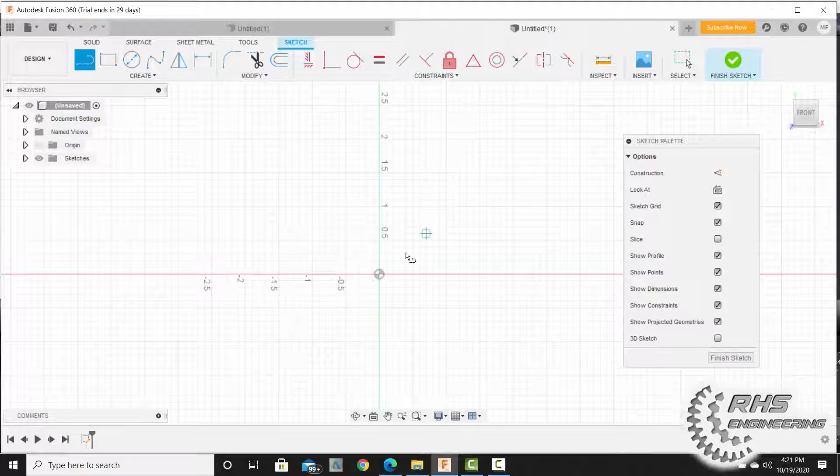Let's come on up, go to New Design. We're going to start a sketch now on the XY plane. Okay, and we're going to grab our line tool. I'm going to zoom in a bit here. And we're just going to start dragging out a line, a horizontal line that is...

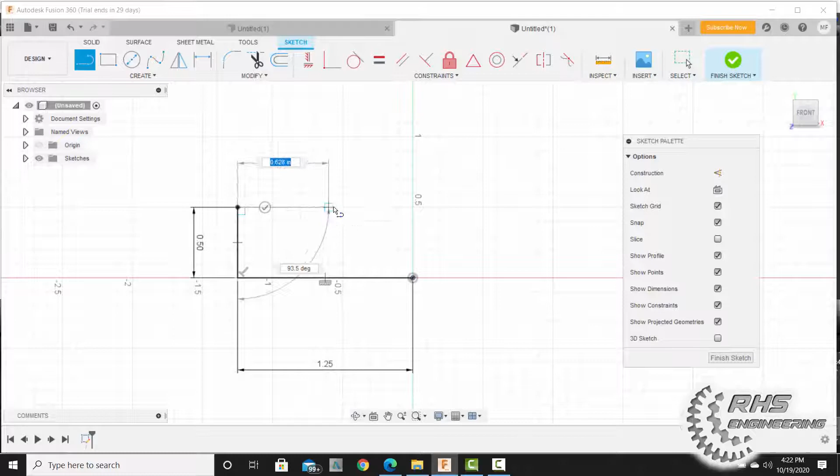1.25 inches in length. Okay, I'm going to zoom in, it's a little easier to see. Grab my line tool again, make a line that's 0.5. Another line here that is 0.75, and then a line straight up that is 0.5, and then a line over here to our Y, our green axis here, and then a line straight down to close our loop.

Okay, I'm going to go ahead now and hit escape. Okay, everything looks good, let me just make sure. I think this guy was 0.5. Yep, and we are good. Let's go ahead and finish our sketch.

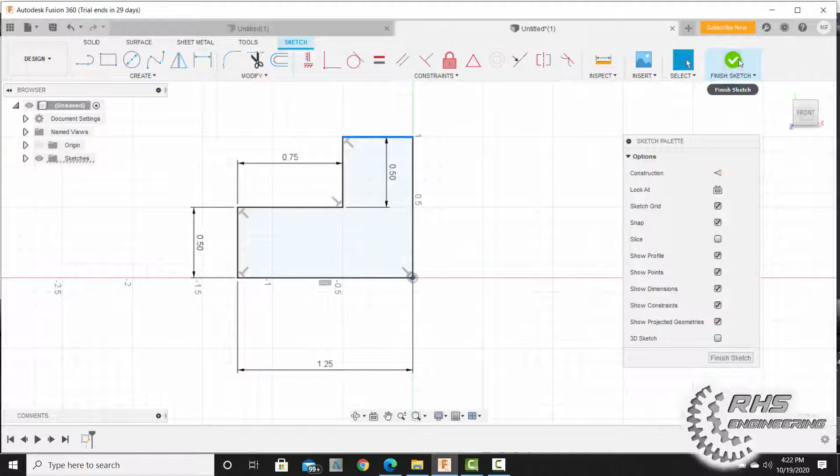Okay, now we are going to extrude out this feature, a distance of 0.75. Hit OK. All right, and we're going to just add a few features here.

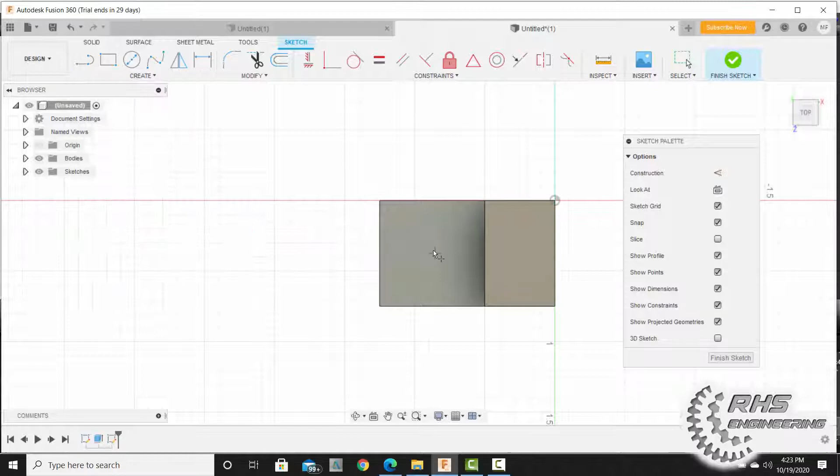So let's go ahead and first, though, create this hole that's supposed to be on here. So we're going to start a sketch right here, and we're going to go to create, and we're going to drop a point right here, somewhere in this vicinity. It doesn't have to be exact.

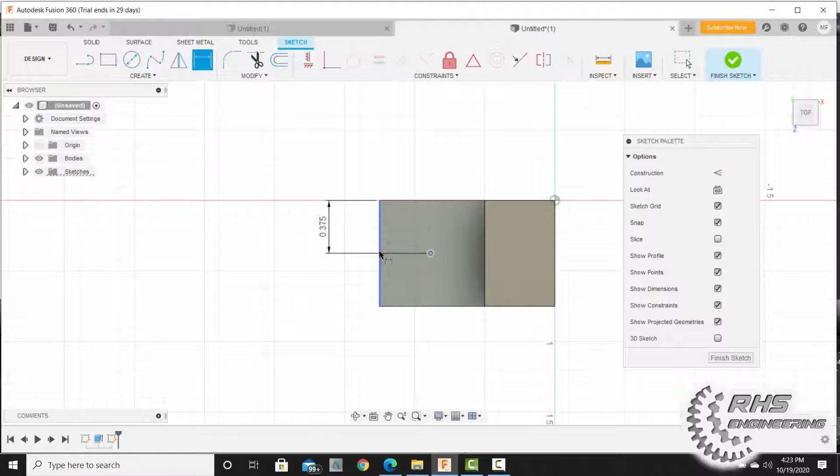I'm going to dimension it though, and I'm going to just say, let's see here, it was 0.75 divided by 2. Okay, and let's do it the other way too, 0.75 divided by 2. All right, now it's centered basically, right? Okay, so we're going to go ahead and finish our sketch, and we're going to put our hole in there.

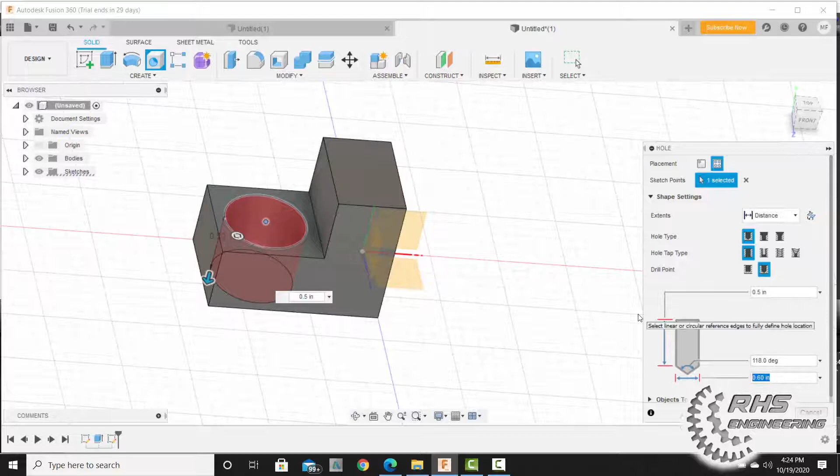And we're just going to click right there, and our hole is going to have a diameter of 0.375. Whoops, I just adjusted the depth. Okay, and let's have it go all the way through here. And I'm sorry, here's where I need to specify the diameter of the hole, 0.375, enter. And we're good. Let's go ahead and hit OK.

Now we're going to add some fillets right here on the corners, and those fillets are going to have a radius of 0.25. Okay, and that looks good. Let's go ahead and hit OK.

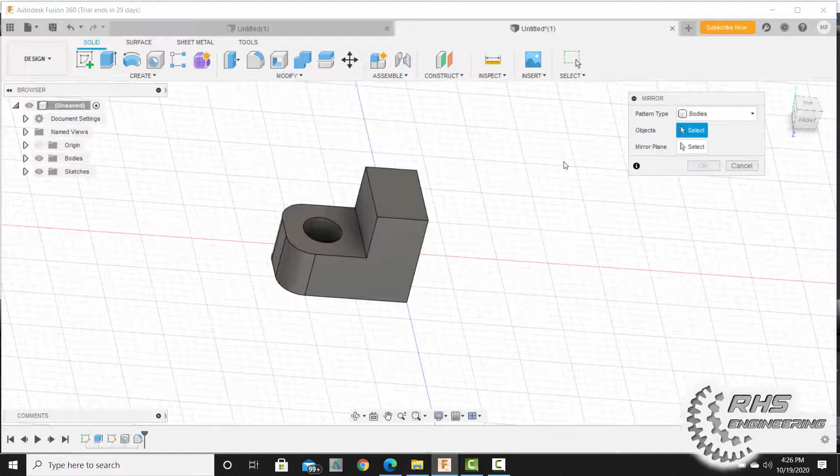And now we are ready to mirror. And to mirror it, come on up to create, let's come on down to mirror again, select mirror. Only this time we don't want to select faces, now we want to select bodies because it's a 3D object. So we are going to, I'm just going to click, and I'm going to just kind of grab it all there, and that selected everything.

Okay, I'm going to hover over, and now it's saying, hey, what's the plane you want to mirror it around? So I'm going to click here, I'm going to click that plane right there, and I'm going to hit OK. And there we have it, a mirrored feature.

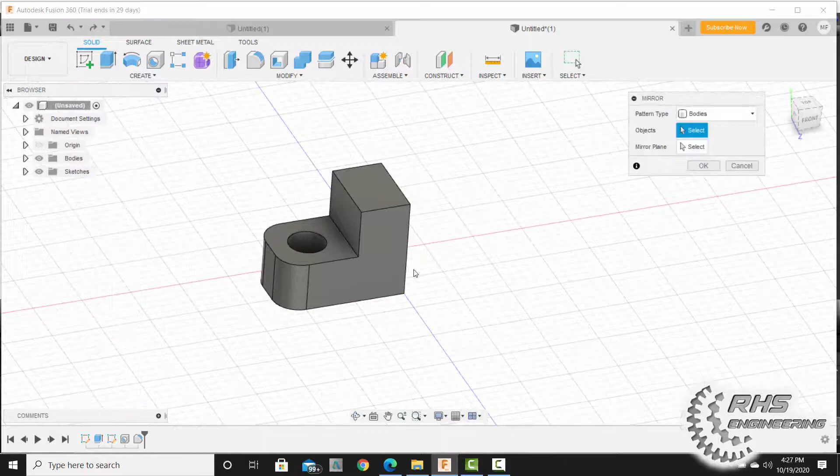All right, but I'm going to show you one other way real quick. Let's go to create, mirror again, bodies. And remember, you can also, a lot of the time, instead of just clicking on this face right here for mirror plane, we could have come on over here to our origin and select our YZ plane as well, okay?

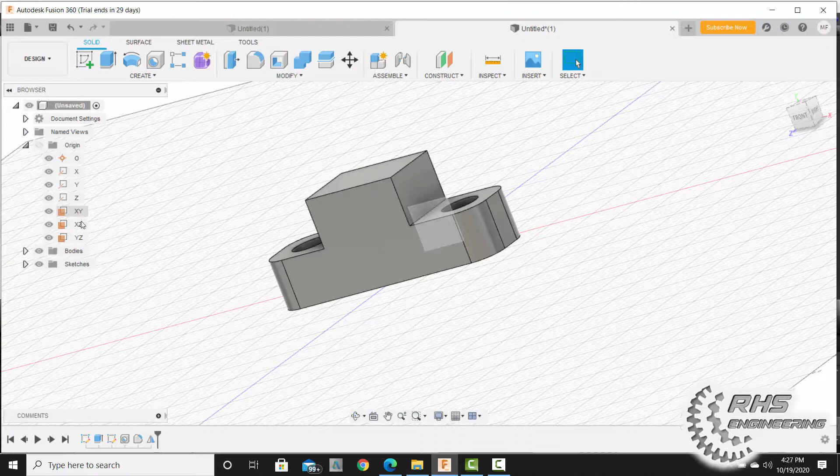Remember, these are the three planes that when we always begin designing something, these are those three planes that pop up, right? Okay, all right, so anyways, that's how you mirror a 3D feature or part.